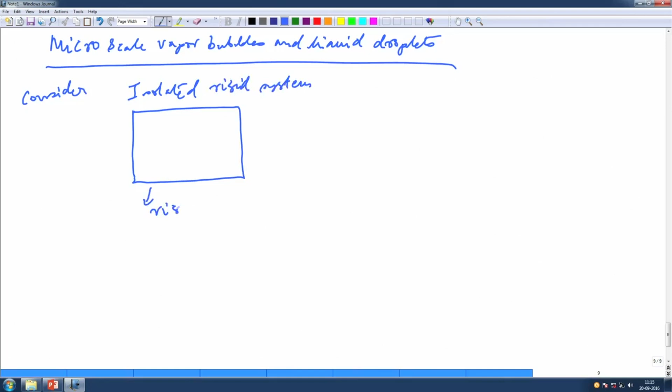So, let us consider a situation where you have an isolated rigid system. Rigid system means the volume won't change, so it is like a rigid vessel. Inside this vessel you have this vapor bubble, and this container is filled with liquid.

The liquid has a pressure of PL and temperature TL. This is the interface, and we covered a lot about interfaces in the last few lectures. This is PV and TV, the corresponding pressure and temperature within the vapor bubble. So this is the situation.

So, it is an enclosed cavity which you have filled with water. This vapor bubble forms for whatever reasons, it could be due to boiling, due to extra heat, but we have this vapor bubble at a temperature of TV and pressure of PV. We have the liquid temperature of TL and pressure of PL, and then there is an interface.

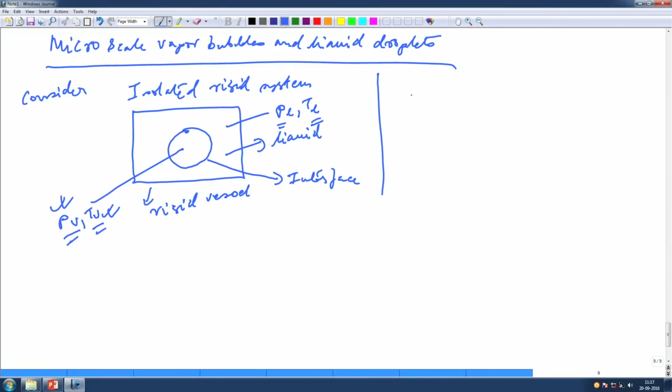Now, from the calculations that we showed a few lectures back, TV is equal to TL is equal to TI. And we also said mu L is equal to mu V equal to mu I. What it means is that the temperature across all the phases is the same: the interface temperature is the same as the vapor temperature, same as the liquid temperature.

We have also said that the chemical potential is the same across the two phases, and that chemical potential is the same in the interface as well. So, this is a vapor bubble, and this is the condition that we got from the thermodynamics we did in the last few lectures.

So, the vapor at temperature TV and pressure PV is a microscale spherical bubble with a radius of RB. If you take the bubble out, this is the radius RB of the bubble. So it is a microscale spherical bubble of radius RB. The liquid is also at a constant temperature of TL around the bubble. So, this part is quite clear.

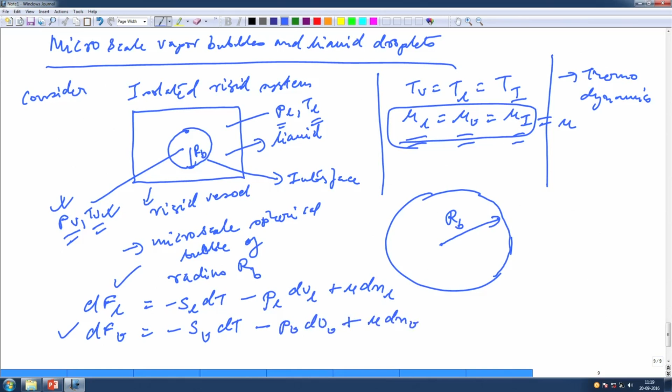Similarly, dFV: one is for the liquid, one is for the vapor. So, that is given as, sorry, I wrote the, got it, that is for the vapor phase. Similarly, we can write the same equation for the interface also, though it is the same.

Got it. So, these are the three relationships that we can write from the three expressions, right. One for the liquid, one for the vapor, one for the interface. And all of these equations we have done previously. So, now we are applying it to this micro scale vapor bubble in a liquid pool, where the liquid temperature is kept constant at TL, right.

Okay. Now, let us go to the next slide. For reversible phase change under constant volume and temperature, dF is equal to dFL plus dFV plus dFi is equal to 0, right, as the change of Helmholtz free energy is actually equal to 0 in such a case.

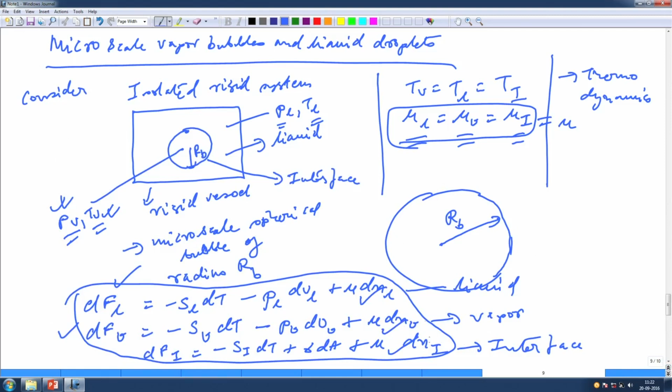Now, if you go to the previous page, we already saw the individual relations, right. Now, let us add all of these things together. When we add all these things together, SL plus SV dT minus PL dVL plus PV dV plus sigma dA plus mu dNL plus dNV plus dNi is equal to 0, right.

Now, the total volume is fixed, that is what we said. It is a rigid vessel. So, dV is equal to dVL plus dVV has to be equal to 0, because total volume is fixed. All right. From mass conservation, what we can say is that the change in moles, dNL plus dNV plus dNi is equal to 0, right.

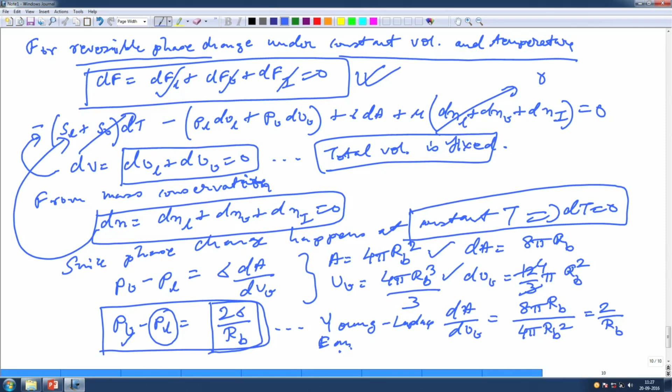Using all that and the definition of the volume and the area of the bubble, we have calculated that the difference between the pressure inside the bubble, PV, and the pressure outside the bubble, the pressure of the liquid, is given by this particular quantity. So, the pressure inside the bubble is actually more than the liquid pressure, because it maintains a convex shape. RB is positive. So, the vapor pressure inside the bubble has to be more than the pressure in the liquid, and this is what happens when a bubble is stable inside a pool of liquid.

So, now that we have done that, let us look at a few more alternative types of definitions. At phase equilibrium, the chemical potentials are the same for both phases, that we already established, right.

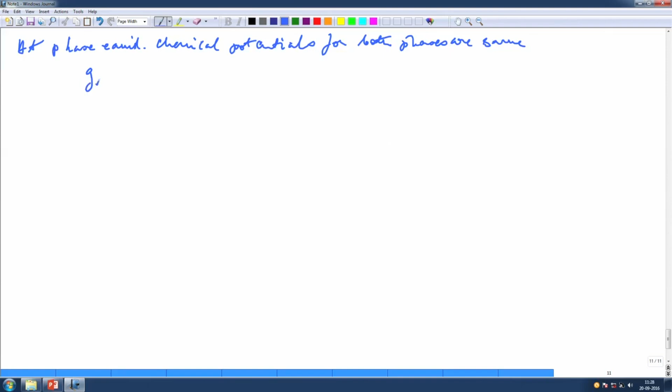Now, using this you have VL dPL is equal to VV dPV. Also we just now saw PV minus PL is equal to 2 sigma by RB, right, that we just now proved. So, dPV minus dPL is equal to minus 2 sigma by RB square dRB. Okay.

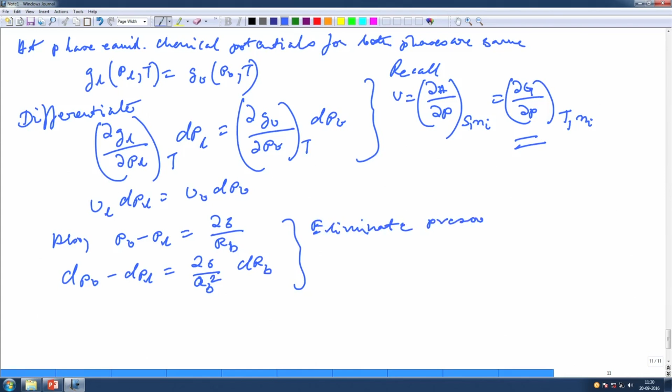So, if we eliminate pressure in the liquid phase, this becomes VL, or if we try to eliminate, it is not yet eliminated, 2 sigma by RB square dRB equal to VB dPV. Now, for an ideal gas, vapors in most cases can be taken as ideal gas. For ideal gas, VB is RGT divided by PV.

So, you put that expression for VB over here, we get RGT dPV by PV minus VL dPV equal to 2 sigma by RB square VL dRB. Now, if the radius of the bubble goes to infinity, very, very large bubble, that means 1 by RB should approach basically 0, right.

So, PV is the same as the saturation pressure, right, because we have taken it is an equilibrium process, there is no superheating or subcooling or anything like that. So, this equation that we have over here can be integrated.

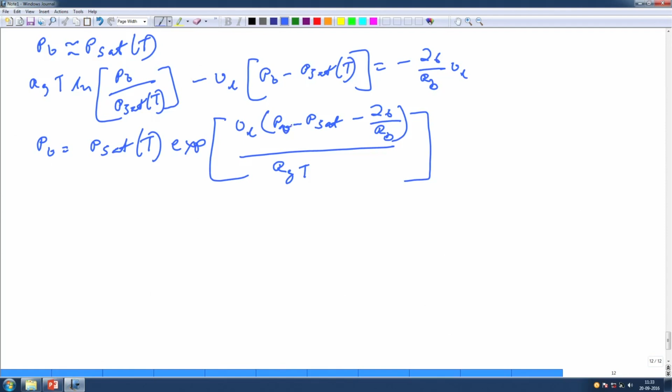This shows that a bubble can be in equilibrium if and only if PV is greater than Psat, right. So, the vapor pressure inside the bubble has to be more than the saturation pressure. In other words, the vapor must be superheated. Got it? So, that comes from the thermodynamics.

So, the vapor must be superheated because this expression shows that it has to be greater than the saturation pressure. So, this is important: for a bubble to be stable, PV has to be more than the saturation pressure at this temperature, where TV, Ti and TL are the same.

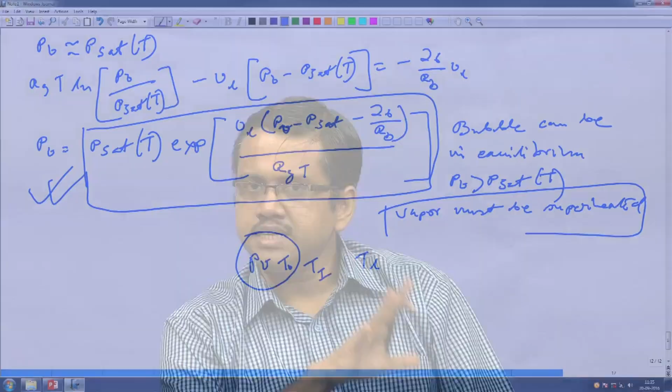So, what we have learnt over here is that we have taken the surface tension analogy and found out what interfacial behavior is. We have applied the same over here and shown two key relationships. One is the Young Laplace equation, which shows that the vapor pressure inside the bubble is more than the liquid pressure.

And second, by following a similar thermodynamic analysis, we have shown that this vapor pressure has to be more than the saturation pressure at the temperature at which this phenomenon is happening, because Ti is equal to TL is equal to TV from thermodynamic equilibrium. So, this almost completes the thermodynamic section.

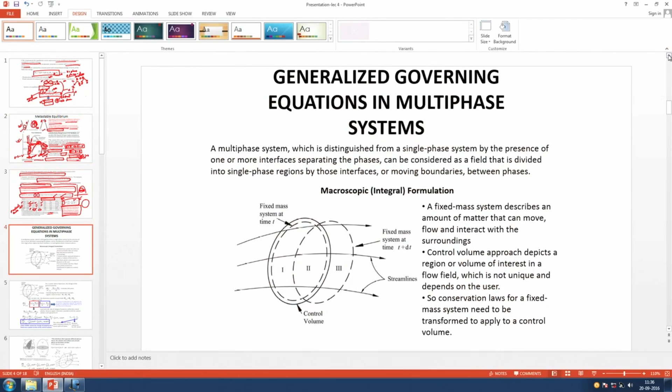Let us look at the presentation once again. So, what we will do in the next class is basically go and solve for the generalized governing equations in the multiphase flow. So far what have we done?

So far what we have done is that we have looked into the individual thermodynamic relationships that connect to multiphases, multi-components. We have looked at the surface tension behavior, which is the most important thing. We have looked at interfacial, when there is an interface present, what happens to the chemical potential, to the temperature. We have also shown a little bit that the liquid and the vapors can be superheated, subcooled, etc., and that is not a deal breaker per se.

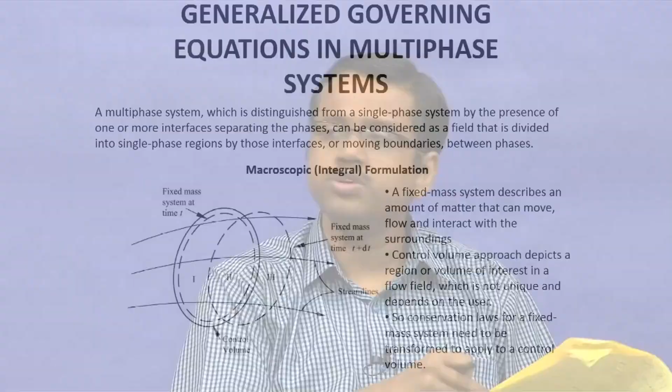Okay. So, now that we have covered the thermodynamics aspect of it, in the subsequent lecture we are going to cover the generalized governing equations in the multiphase flow, because the generalized governing equations are the equations which basically tell you how transport happens. So far we have not taken into account any transport over here. We have just looked at the thermodynamic principles, what is non-PV work, what is PV work and things like that. So, just to close this lecture, let me give you a brief recap.

What we have done is that we have looked into the first law and the second law of thermodynamics essentially for a closed system. Then we have gone through Gibbs phase rule, because Gibbs phase rule gives you the degree of freedom of a system. We have also looked into the equilibrium and the stability of single phase closed systems, and this is where you get the different principles, that the change in Helmholtz energy has to be less than or equal to 0 and things like that.

Then we have looked into the Maxwell's relationships, which is one of the most important parts. You are also suggested to study thermal, mechanical stability and chemical stability. There are 3 types of stabilities, but that you can read from your undergraduate book, which shows what the 3 stabilities are and what the requirements are to fulfill them. We have also looked into systems with compositional changes, but having a single phase. So, that means it is a multi-component system.

We have looked into systems which have got 2 phases and what the criteria are, and we have seen that temperature, pressure and the chemical potential have to be the same. We have also looked into the Clausius-Clapeyron equation and the Clapeyron equation. Then we have looked into the thermodynamics of the interfaces, what will happen when you have an interface in the picture, and subsequently we have looked into the definition of surface tension, and we have given as many as 3 definitions: with respect to energy, with respect to Gibbs free energy, with respect to Helmholtz free energy, and we have shown what surface tension is all about.

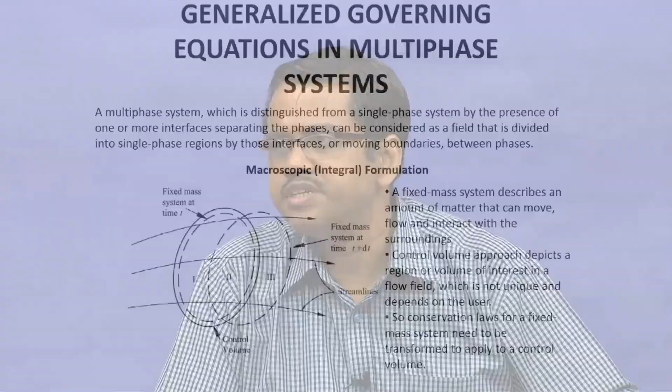And apart from that we have done this microscale bubble and liquid droplet analysis to show what the stability criteria are, or what will be the pressure inside a vapor bubble. And the same can be done for the liquid also. So, it is not a big thing. So, that is what we have done through the course of these few lectures. In the next lecture we are going to start with the generalized governing equations in multiphase systems. So, that will be next.